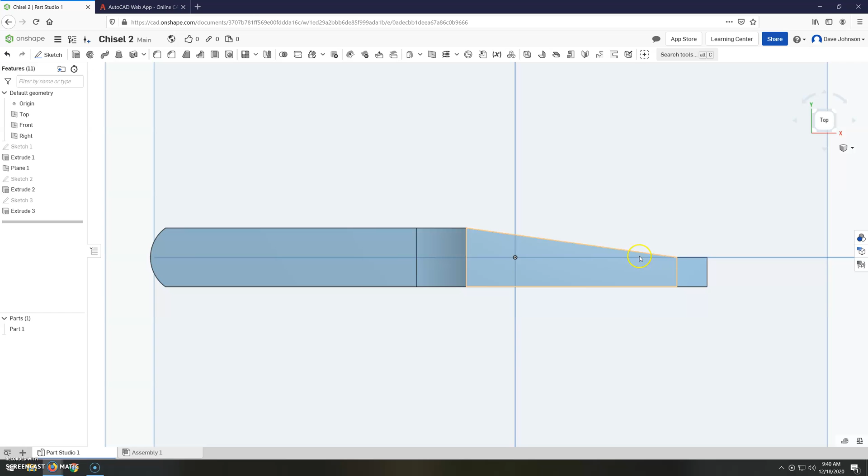And then we're going to cut this taper into the chisel. We're going to remove some material over here. And then last, we're going to add this rounded portion on at the end. It's because the dimensions are derived from this edge instead of the very end of the chisel. It's actually a lot easier to add this on at the end than it is to try and incorporate that at the beginning.

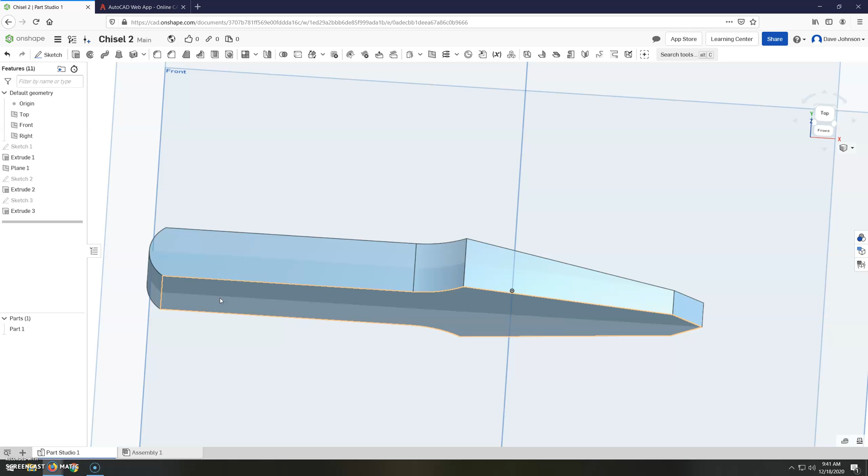So let's look at our drawing. I've added a few lines here. I'm going to remove them temporarily if I can. Alright, so this is our original drawing of our chisel. A few things to note here. Number one,

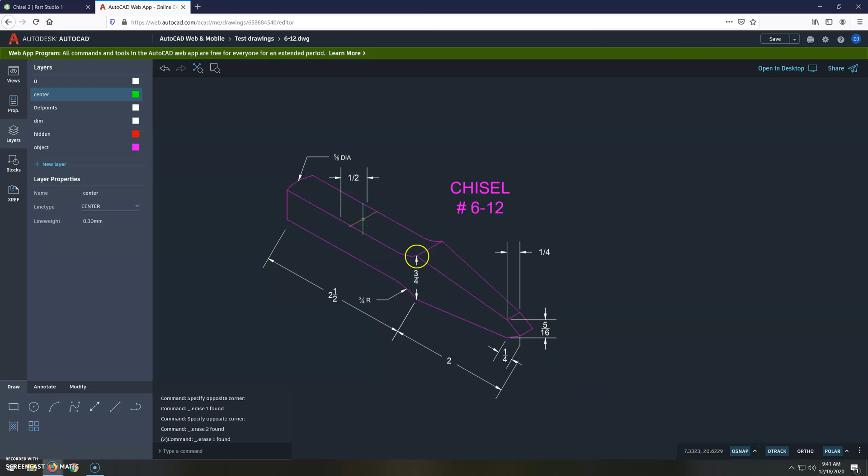this back portion here is called the shank. Again, a chisel is meant to be driven with a hammer or a mallet struck on this end, and then the pointed end down here is where the cutting action happens. So this back portion here is called the shank of the chisel. It's essentially the handle portion. It's what you would grip with your hand or with a pair of pliers or something like that.

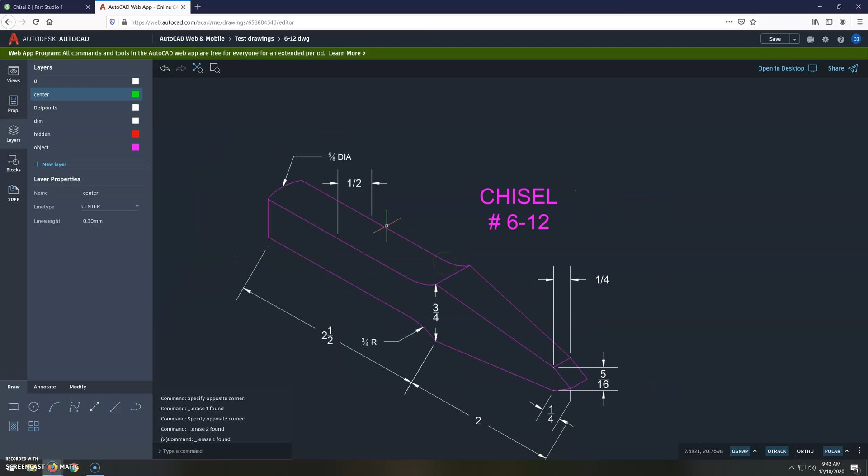Because of that, this is kind of made from like a standard bar stock, so we would assume that if it's half an inch here, it's also half an inch tall. The reason why we have to assess that right away is we want to know our height here, because we know the length of this portion is 2.5 inches up until this 3/4 of an inch where it sort of flares out. But we don't know the height until we make that assumption. So we know that this section is half an inch tall by 2.5 inches long.

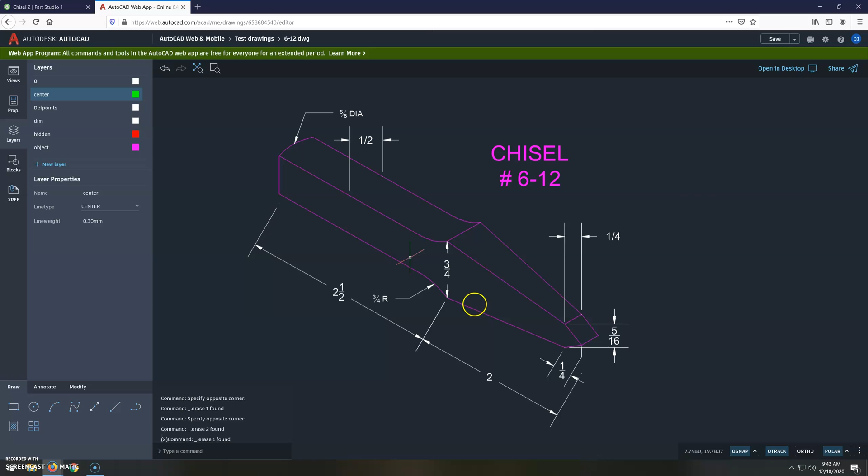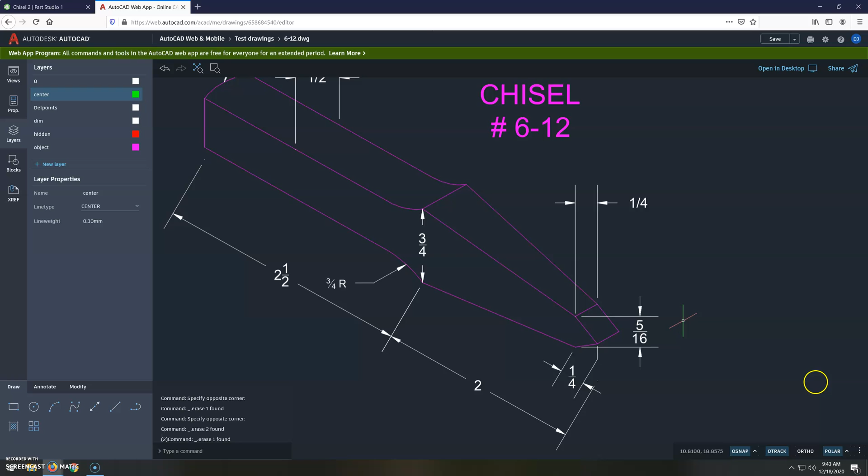If we kind of forget the curve, the radius here for now, this section, the point section, starts at 3/4 of an inch tall by half an inch in depth, and it moves down, and it gets down to 5/16 of an inch. And then 1/4 of an inch later, it comes to a point. And then at this point where it's 5/16 is also 1/4 of an inch in depth, whereas it's half an inch in depth here. So we've got some amount of tapering going on in our depth as well as the height. We need to identify where that taper happens on the depth side.

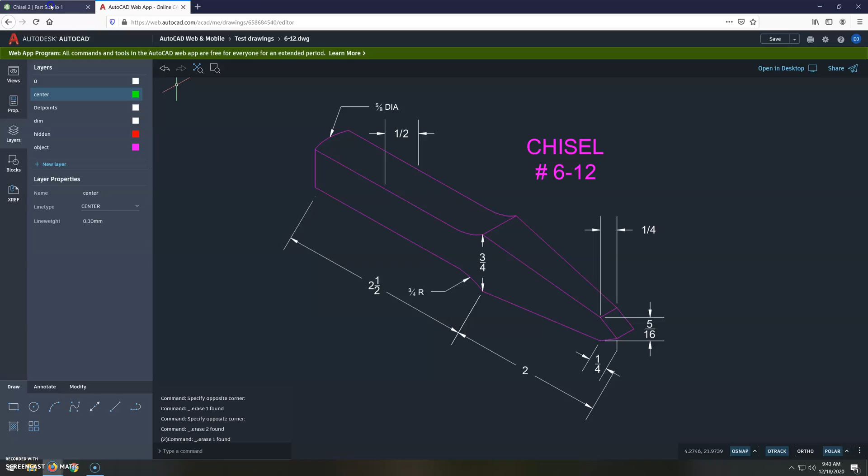One thing to note here is that on this entire surface, there is no sharp line to indicate that the taper would start there. So this is one big flat surface. If we look at our chisel in 3D, we can sort of indicate that. We can see the tapers on the back side here. This is our original orientation. We can see that this is one flat surface.

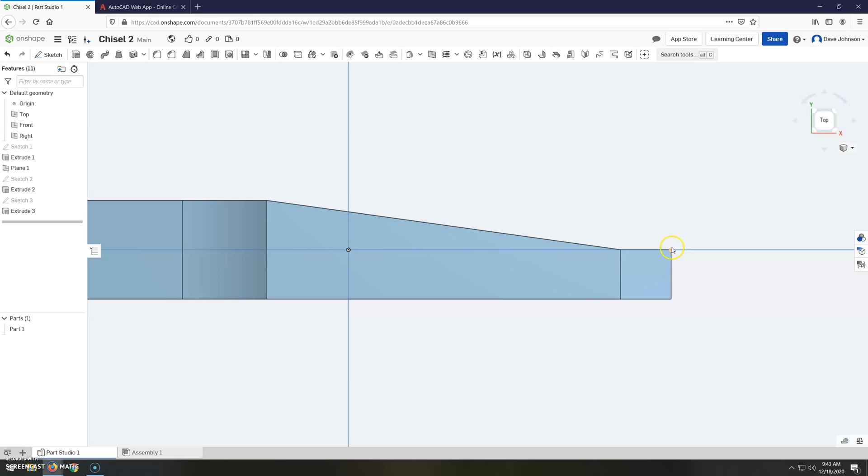So we're going to keep that one flat surface. If we look from the top, we can see the taper comes down here on the back and then straightens out for that last 1/4 of an inch section. Now that we've got the basic concept here, how are we going to build this?

Let's look in AutoCAD just before we get building in OnShape. One thing we're going to do is start with a center line, a construction line down the middle. We're going to draw that 2.5 inches. And then once we have that 2.5 inch line drawn, we're going to symmetrically draw a 3/4 of an inch line right at the end of it.

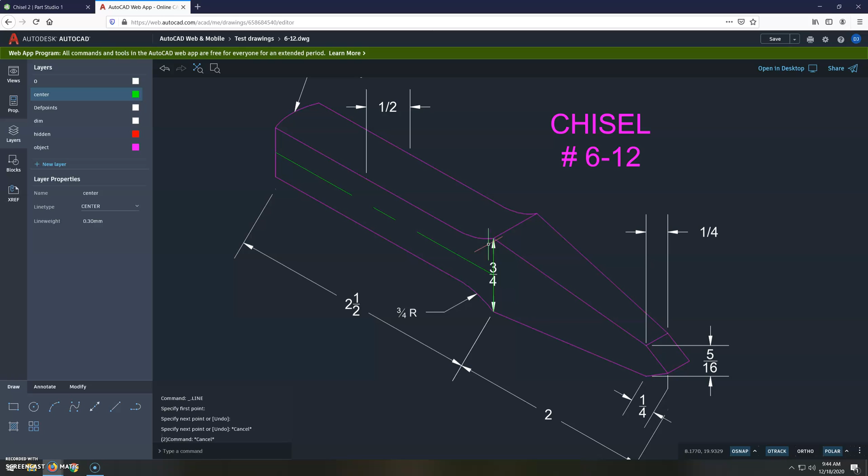It's actually easier to do in OnShape than it is in AutoCAD because we can use the dimensions to sort of move it around. But essentially we're creating this point and that point by drawing this line. Then we'll continue on down. How far? We're going to continue this line from here. We could continue down 2 inches to the point.

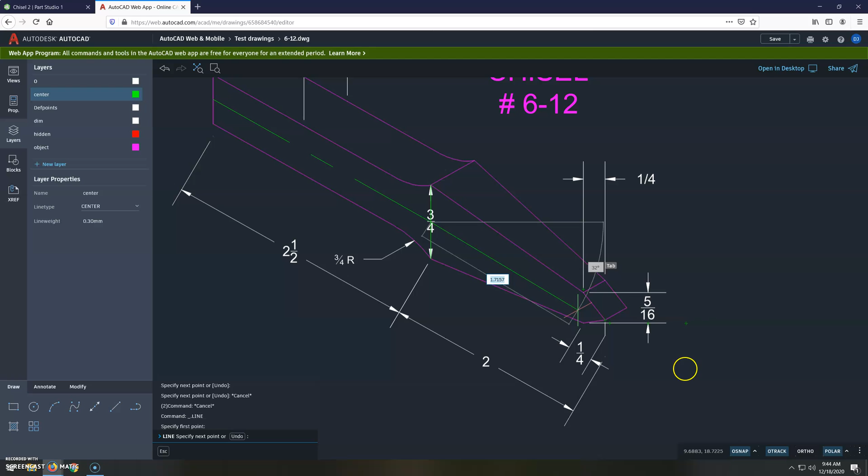However, we have these other 2 points here that are 5/16 of an inch apart. So it actually pays for us to stop here, draw our vertical 5/16 line, and then continue on, much like we did for the 3/4 of an inch line. So how far is that? Well, if the total length is 2 inches remaining, and we're removing 1/4 of an inch, that leaves us with 1.75. So we'll do that.

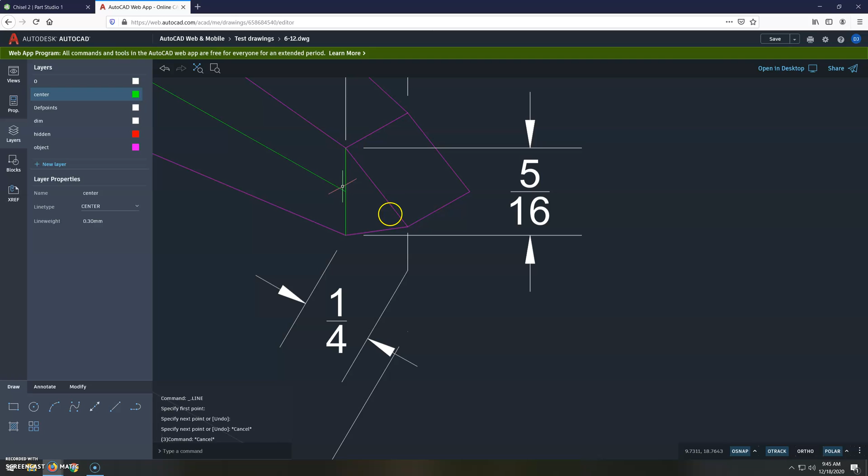Then we're going to draw in our 5/16 tall line. Again, this would be symmetrical about the center line, so it would be 5/32 above and 5/32 below. And then just to flesh out the point here, we would go 1/4 of an inch longer.

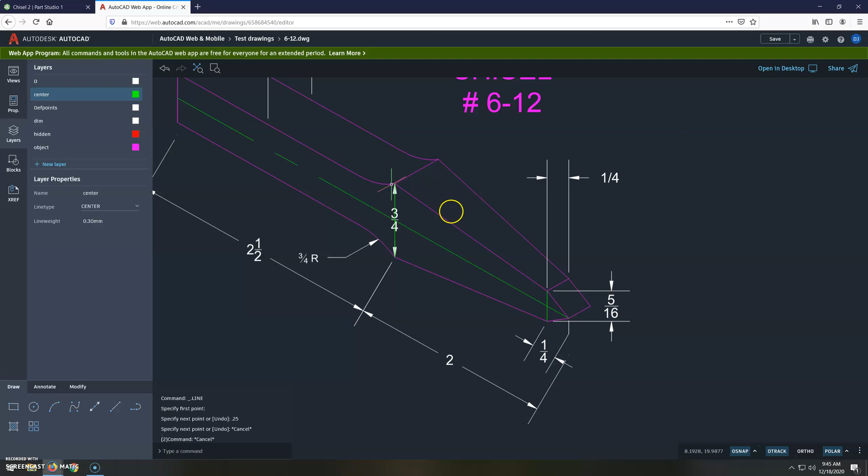So then if we were to only have the green lines as skeletons, so to speak, we would be able to trace at least the front half of this, the point portion of it, almost like connect the dots. We'd start here, go to here, go to here, go to here, go to here. That's exactly what we're going to do in OnShape.

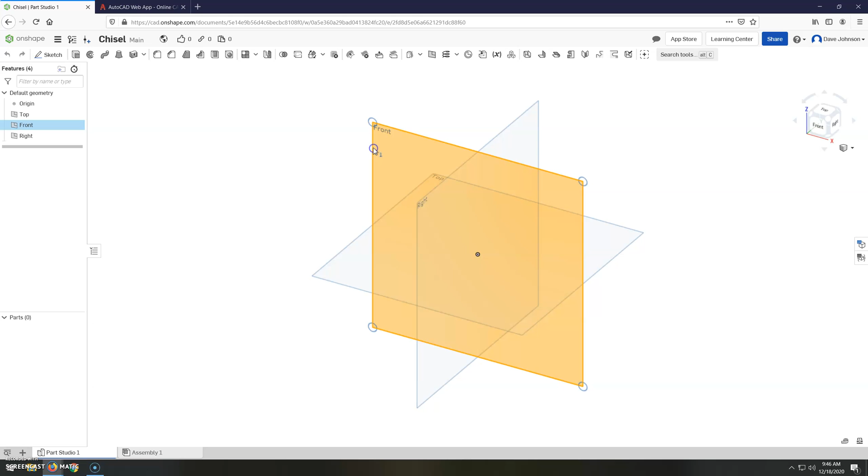Let's go back. We'll create a new document. Call it Chisel. And we're going to start drawing right on our front plane here, new sketch. And we're going to draw all those green lines that we drew in AutoCAD as construction lines here in OnShape. And I just find if we line everything up at the center point, that'll just make life easy. So we're going to click on construction and line, because we're drawing a construction line.

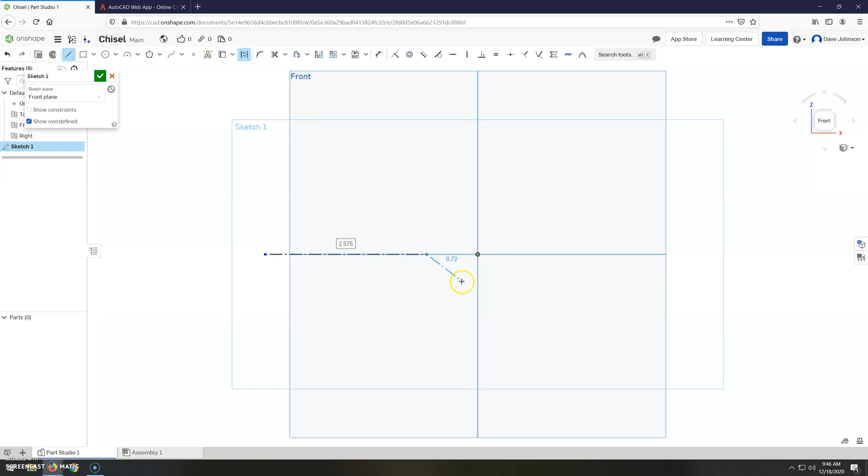We're going to line up with our center point there so it turns gold. And we'll just draw a rough line there. We'll dimension it to 2.5. Again, we're breaking the line up at each of these major changes in height. And we'll draw a vertical construction line. Again, we want to click line and construction each time we do this. Right at the end of our line that we drew there. Again, I'm getting it close. We're not being perfect about this, and just dimension it to 3/4 of an inch.

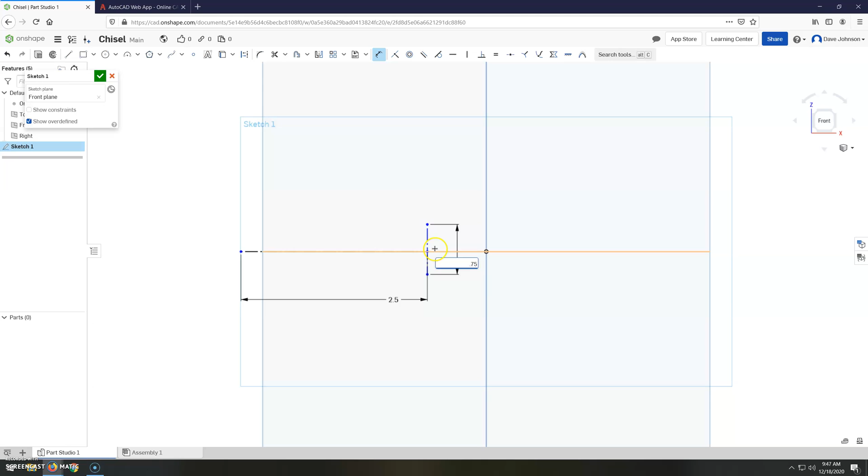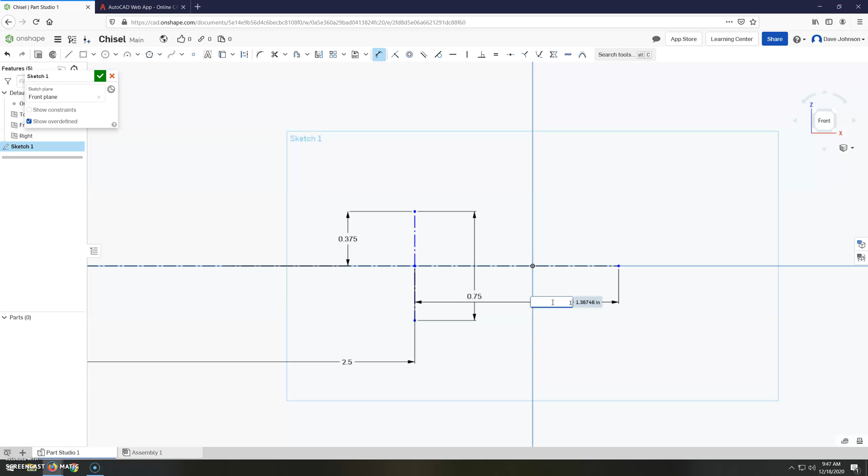Now, this is not symmetrical. This distance down here is not the same as this. So we need to tell it from the end of the line to our center line here is half of 3/4. So half of 3/4 is 3/8. That'll center that up. We'll draw another construction line. Remember we said 1.75, so we'll just draw that out and we'll dimension it. 1.75.

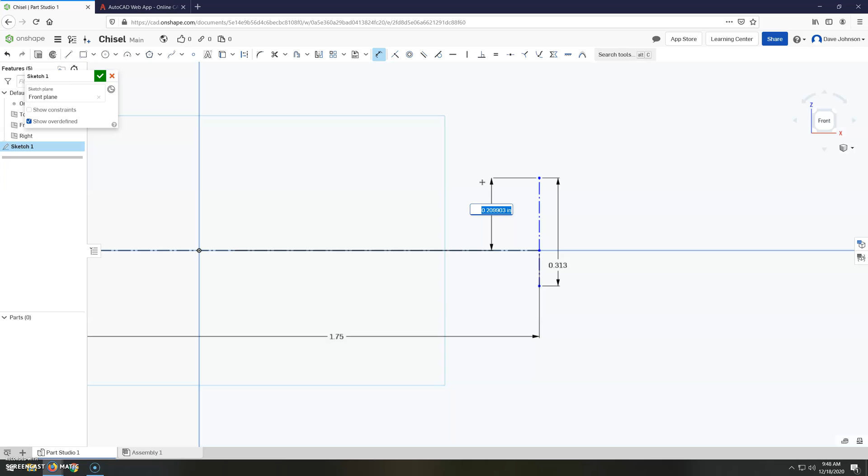We're going to repeat that same process we used for the 3/4 of an inch line down here, except our line is only 5/16 tall. So again, line, construction, hover over the end so we get that little indicator here. We'll dimension it, 5/16. And we're going to work again from the end to our center line. It's going to be half of 5/16, which is 5/32. We're just doubling the bottom number of the fraction.

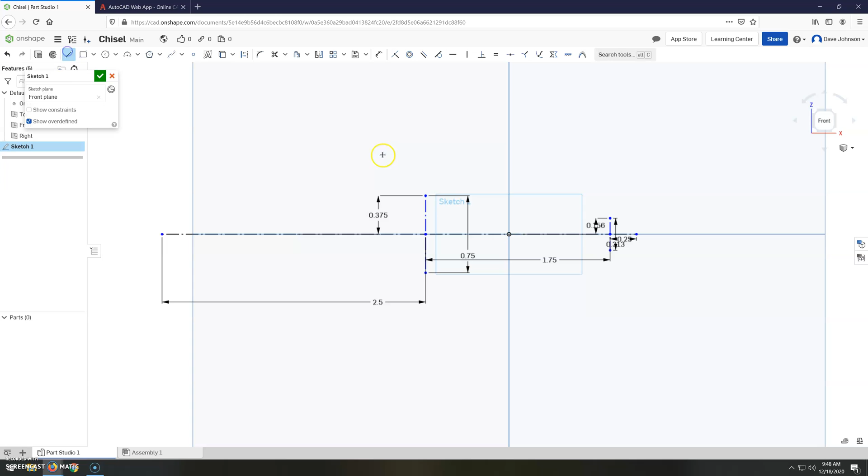Okay. And then the last thing we're going to do is just extend our construction line again. Again, make sure we're clicking construction. That's important. We're going to extend it out to 1/4 of an inch. Okay. Now we have our skeleton built here. Now we can start drawing this thing out. So let's draw the front. So we'll go line, and like I said, we're just connecting these points up. Nothing terribly difficult. Make sure that everything's touching here. All these points look good.

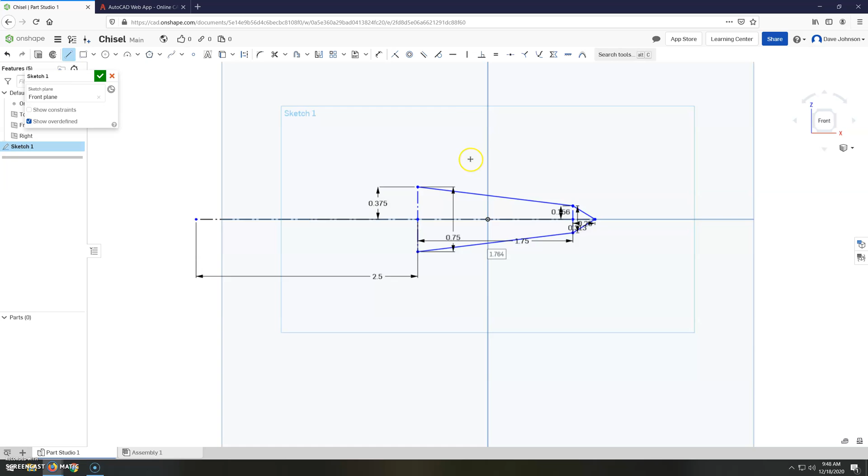All right. And now I'm just going to temporarily finish the sketch just so you can see what we have. So we've got just the front outlined here, and then we're going to do our 1/2 inch by 2.5 inch rectangle on the back, but it's got to be centered up height-wise. 1/4 of an inch above, 1/4 of an inch below. We'll just edit our sketch.

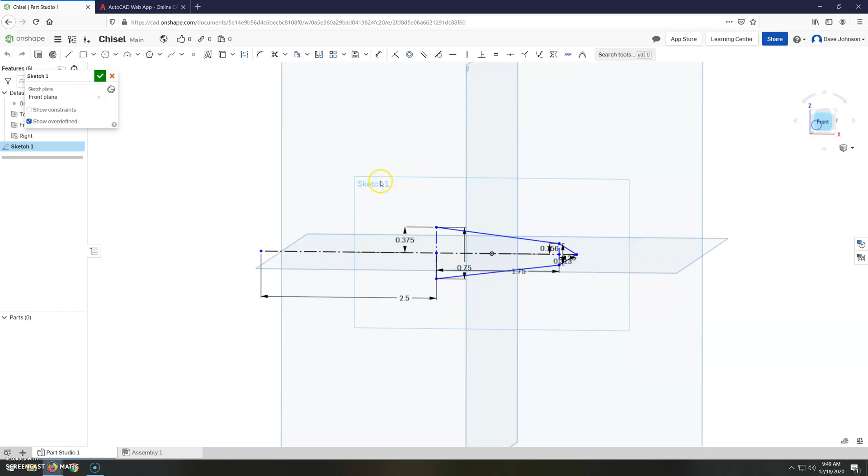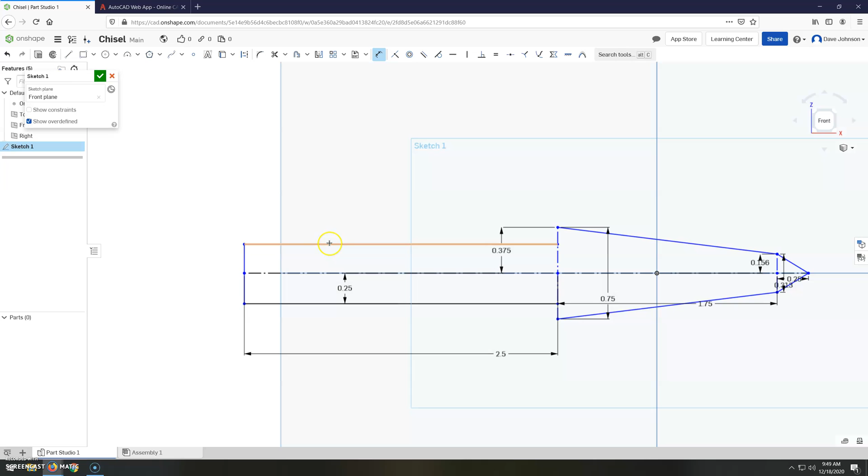So what I like to do is just start here. We'll just draw up a little bit and draw over, connect things up. We'll draw a little bit down and a little bit over. And we just dimension it. From here to here, 1/4 of an inch. Here to here, 1/4 of an inch. And everything is pretty well defined here.

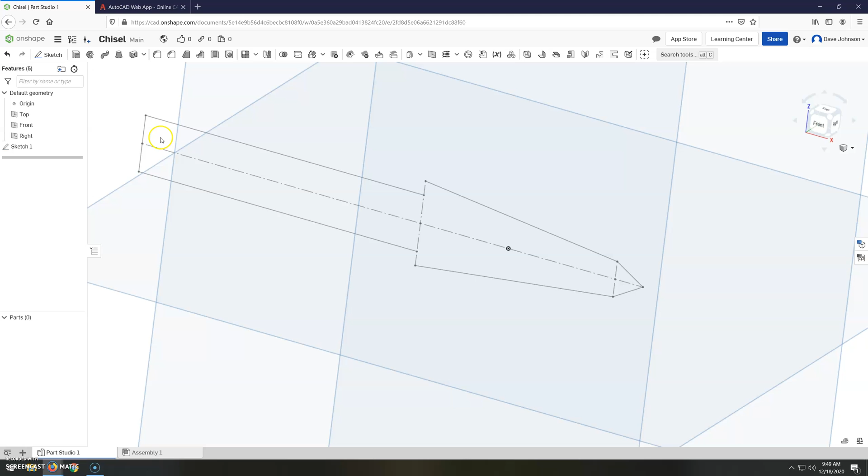We're going to finish our sketch again just so we can analyze this without the dimensions being in the way. A few things to note here. Number one, notice the interior of our shape has not gotten darker, and that's because we haven't filled in these gaps here. Yes, the construction line is there, but they don't count for closing in our profile. We need to put the curved portions in next, and that'll close up our profile when we do both of those. So let's do that. Edit.

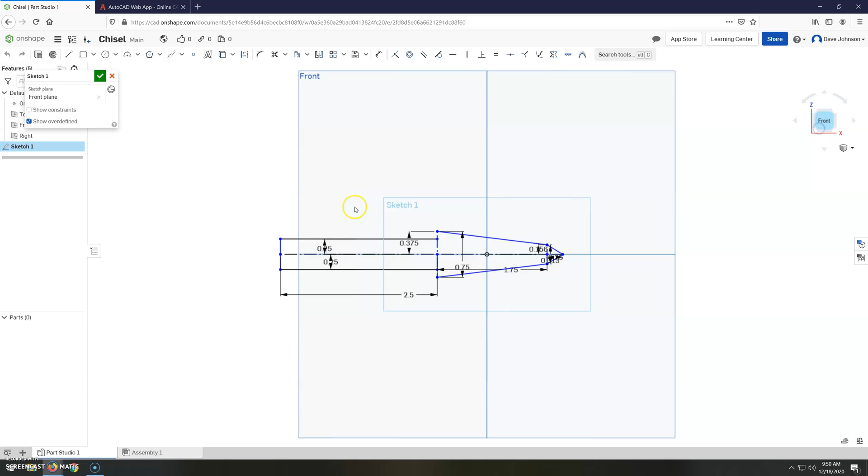Now, how big are these curves? What do we know about them? We know the curves are 3/4 of an inch in radius, and we know they are tangent to our shank and touch the 3/4 inch height portion, so they're coincident with it, if we want to use proper terms.

Let's draw our circles. Okay, let's draw 2, why not? We'll dimension both of them. They're going to be 1.5 because they're 3/4 inch radius. Again, remember, radius and diameter, important to make the distinction.

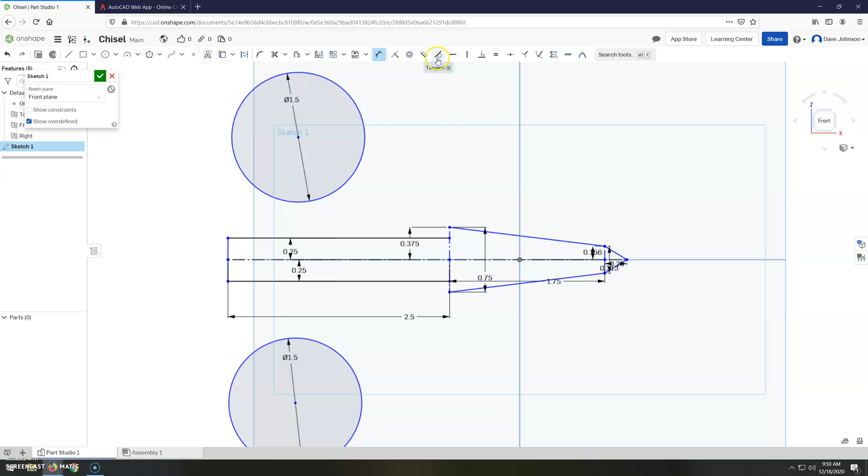And then we're going to select tangent, and we know this circle is tangent to this line. We also know this circle is coincident with that point, right where the 3/4 mark is. Now we can come in with our trim tool and clean this up, just take out that little section of line. Now you can see we've got this nice transition.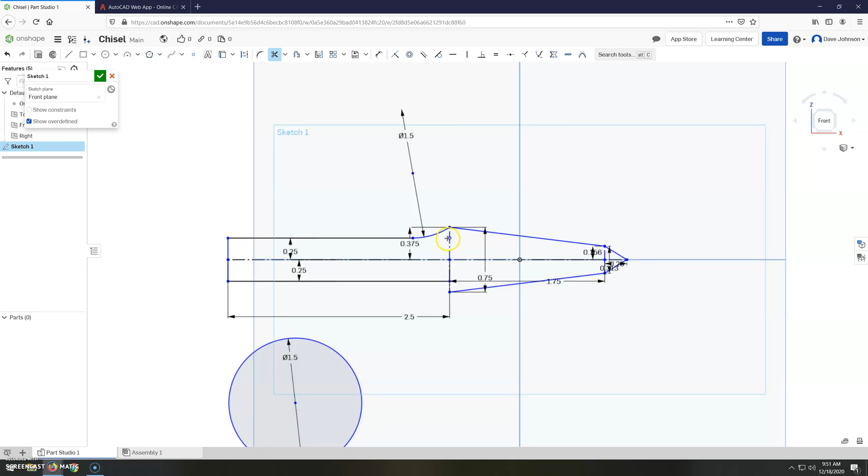We'll do the same thing here. So tangent first, and then coincident. And then again, come in with our trim tool and clean this up.

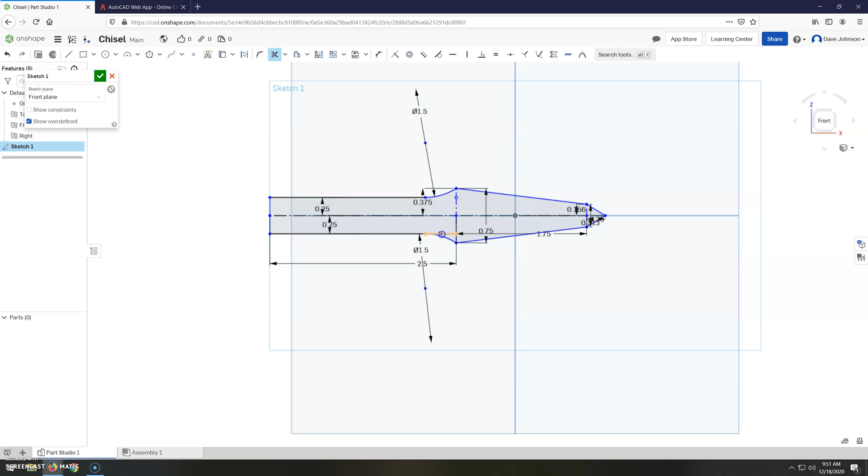All right, we are ready to extrude. You see we've got a darkened in profile here. Again, our depth is going to be 1/2 inch. So we will click extrude, select our profile. Let's do this symmetrically, why not? 1/2 inch. Okay, next we need to remove some material on the back so we can get to that tapered section.

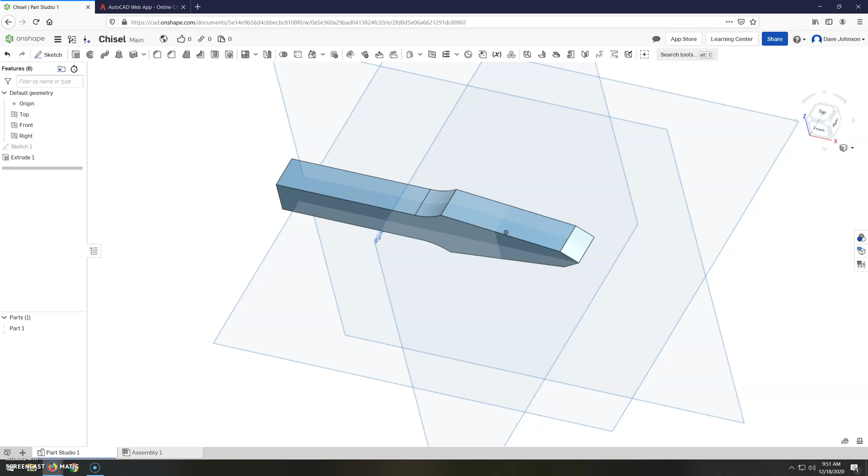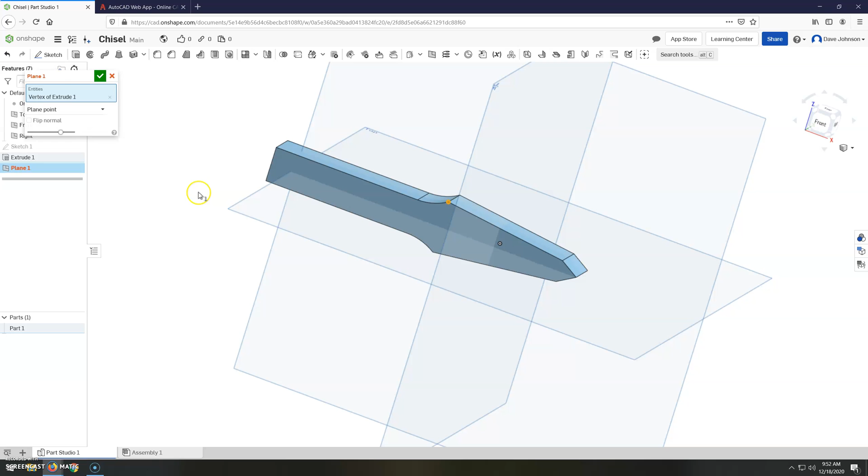So in order to do that, we need a profile, a plane that we can draw on. Right now there's no flat surface on the top, so it's easy enough for me to just offset this plane up. We'll click plane, switch it to plane point. We're going to click a point right on the top, and click a plane that's parallel to how we want to draw. Right there, you can see we've created this plane right at the top of our chisel.

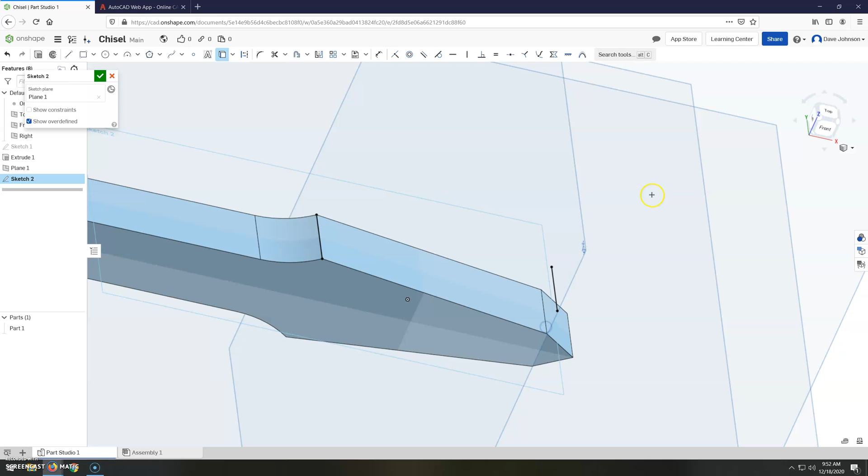We'll accept that. We're going to draw it right on plane 1 here, new sketch, view normal to that surface, and then we can draw in our taper. To draw the taper, we're going to click the Use button. We're going to use the edge where it's 3/4 of an inch, and the edge where it's 5/16. We want both of those edges, so we'll look back normal to that.

We're just going to connect those points here. From here, we're going to come down right to the midpoint. That gives us our 1/4 inch in depth here. And we're just going to come straight out from there. Doesn't really matter where we put these last 3 points. So something like that, and we will finish our sketch.

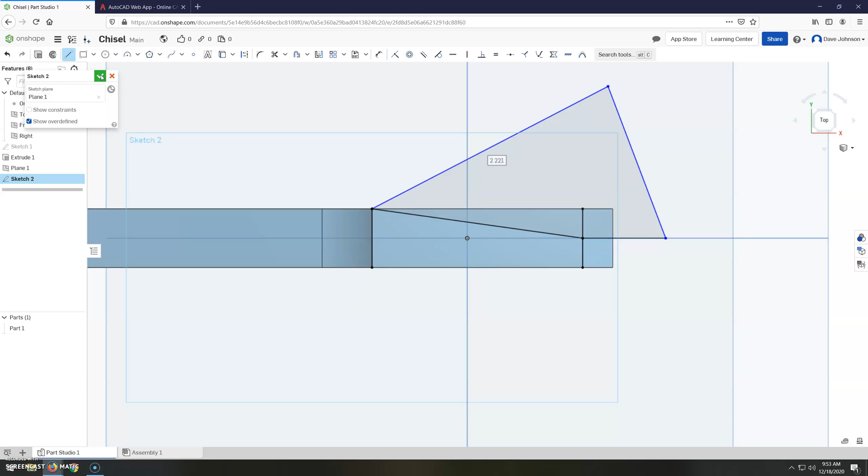And now we can cut and remove that material. Go to extrude, we'll click on remove, select our profile. You see it's giving us a red error here. We're just going to click merge with all. Now we can see it wants to remove that material, and there we go. That looks good.

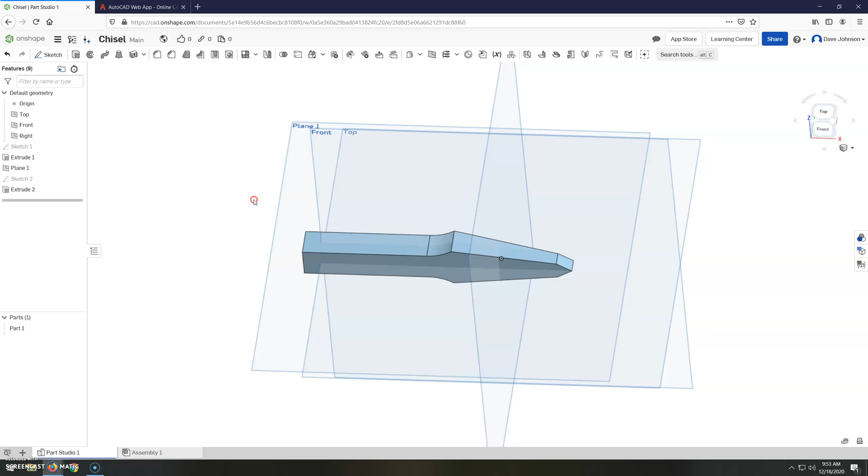Okay, and then the last thing we're going to do is add our rounded end here, which if we look at the dimension of that, is 5/8 inch diameter. So we're going to click right on that surface, new sketch, look normal to it. We're going to click Use again. We want to grab this edge and use that as part of our sketch.

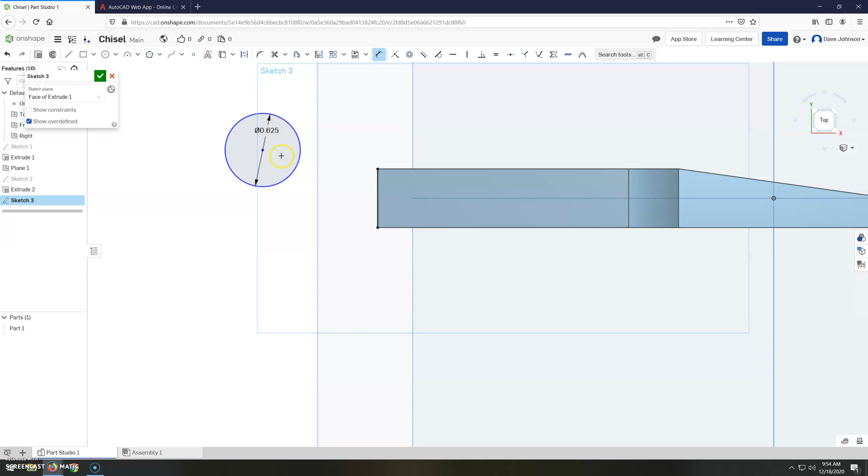We'll come in with our center point circle here, and just draw a circle out here. We'll dimension it to 5/8 of an inch. Okay, and we're just going to drag our circle kind of over top of about where we want it to go.

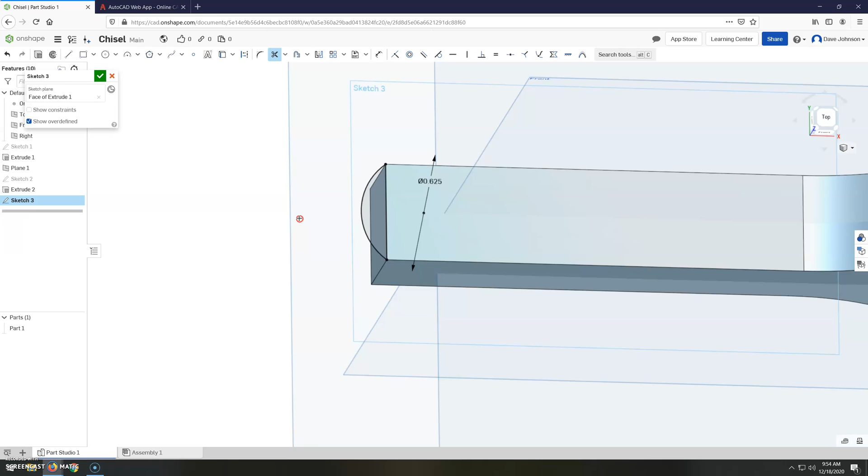We'll use the coincident constraint to tell it the circle is coincident with that corner, and we'll do that again here—circle coincident with that corner. See, it snaps into place. Use the trim tool to remove most of it, and we can finish our sketch.

Extrude it, we are adding material this time. We'll select our profile, flip it around, and then we're just going 1/2 inch. Okay, our chisel is done.

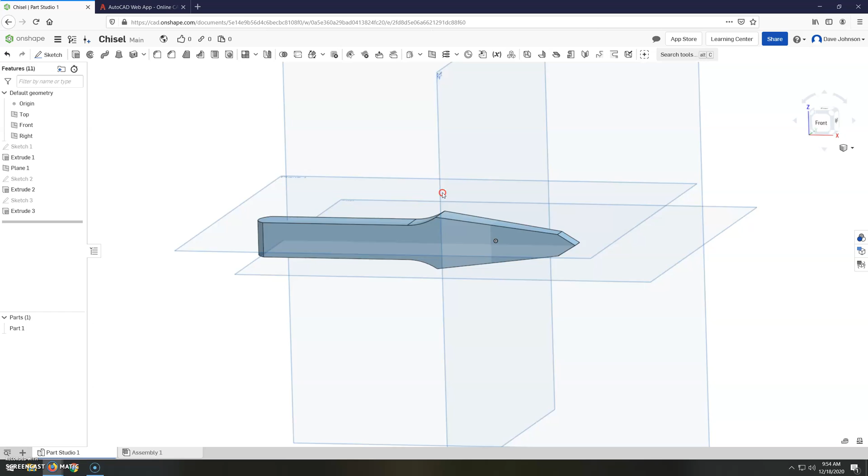So again, this is our starting view here, and we're going to look at the top. We can see the taper down to 1/4 of an inch here from 1/2 inch, so that's why we're right on that midline there. And we've got our 5/8 round down at the bottom.